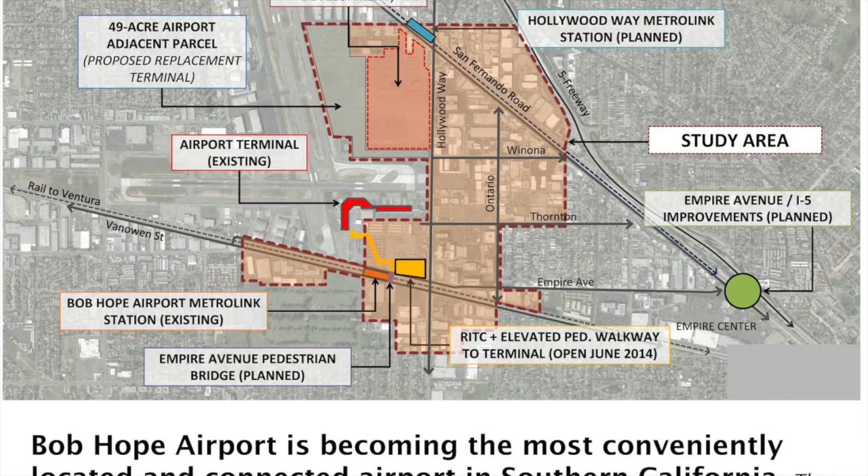So let's just first remind ourselves about what it is that we've been studying for the last 18 months. Our study area from the land use perspective is 540 acres of industrial land that is adjacent to Bob Hope Airport. It's primarily on the east and the south side, and it lies entirely within the city of Burbank.

Bob Hope Airport is clearly the defining feature of our study area, and it's a really interesting small-scale airport. It's the only airport in Southern California that has rail access. It is one of 2 airports in the country that has Amtrak access. And with the recent opening of the Regional Intermodal Transportation Center, its opportunities to connect have become even much bigger and better.

The study area historically was associated with the aerospace industry. It is still zoned primarily industrial. Lockheed was the anchor tenant for decades, but left in the 1990s. There are still significant aerospace users that continue to occupy or have business activities in the study area.

In the last 10 years, the study area has observed a fairly dramatic shift in employment trends. There are about 10,000 employees currently in these 540 acres. Industrial jobs have remained stable, about 2,500 ten years ago and still 2,500 today. What has really increased dramatically are infotech and media-related jobs, to the point where they now constitute the majority of jobs in the study area.

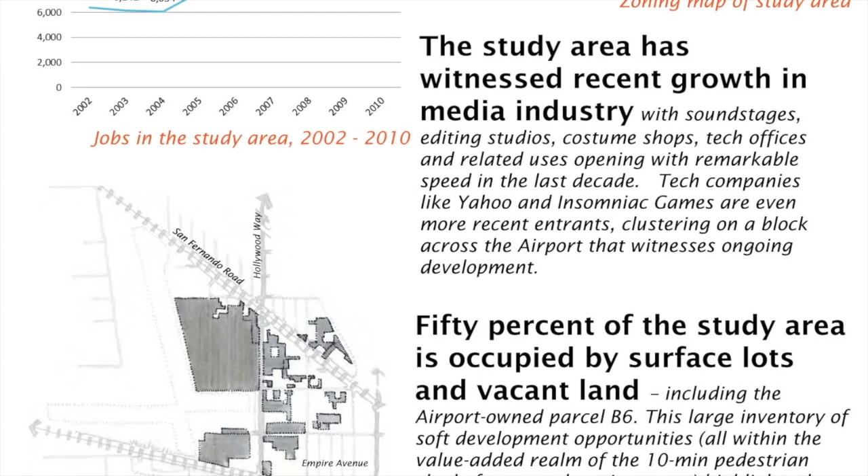So while we still consider this area industrial, the underlying industries are really not industrial anymore—they're more related to infotechnology and media. I'll come back and talk a little about why we've seen this dramatic shift happen in employment, and why the Bob Hope Airport area is so unique in that shift.

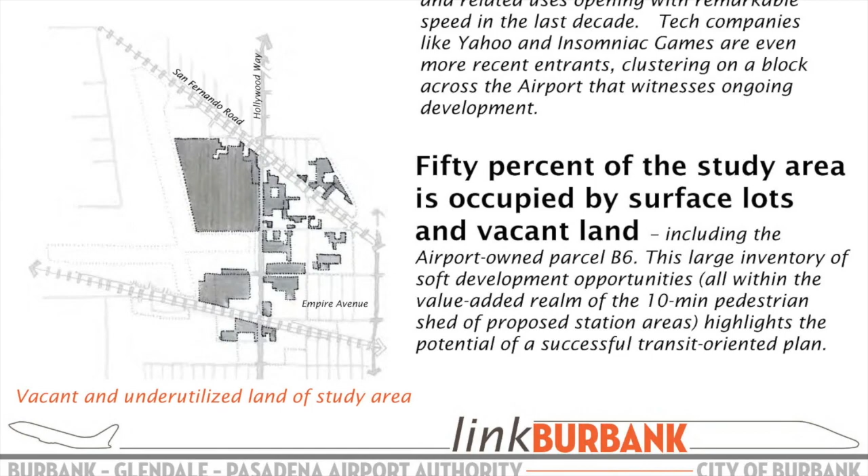The last point I want to touch on this slide is the utilization of land. The diagram on the bottom left highlights in gray all the land parcels that are either vacant, have surface lots, or are just underutilized. Our analysis shows that about 50% of that 540 acres is underutilized, so there is a significant opportunity to rethink and reinvent how land can be used in our study area.

As Patrick earlier said, this is our third and final workshop. We've had two previous workshops, one in June of last year and one in March earlier this year. A few themes have emerged from our conversations with you, and I'll touch on a few of them.

The first is this recognition that the airport is clearly an asset, that it has helped the local economy, not just of the Valley or Burbank, but of the immediate study area, the 540 acres we're looking at. Another theme that emerged very clearly is that Burbank is special—things that may be acceptable in other places, even in the region, are not necessarily so in Burbank, and we recognize and value that. We've also had discussions on the adjoining neighborhoods and this very strong desire to preserve the character of residential neighborhoods around the study area.

Upfront, I just want to say that all our analysis and the study area we're looking at is all industrial. So nothing that we're proposing directly impacts the residential neighborhoods or the residential populations adjacent to the study area.

A few more points: there's a need for the image of the area to be upgraded—the quality of the streets, the quality of the public realm, the kinds of amenities residents and workers have access to, that needs upgrading. And finally, this notion that industrial land uses and industrial zoning often preclude amenities that workers and residents of the area may look for and desire, meaning industrial land use may need more flexibility in the future.

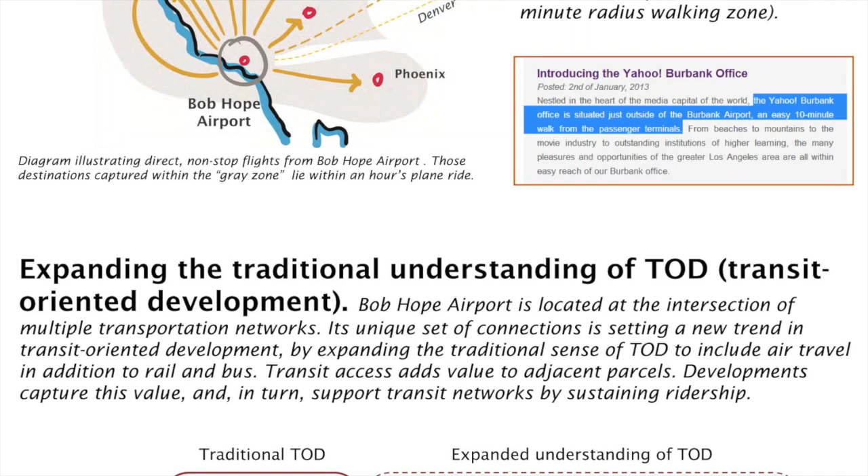Private developers capture that value by clustering jobs and homes around that access, and in return the transit system gets ridership—that's what makes the system work. Typically, transit-oriented development has been associated with light rail or bus rapid transit. When we talk of TOD, which is what us practitioners call transit-oriented development, it's usually bus rapid transit and light rail.

What we've learned through our analysis here in the Bob Hope Airport area is that the Bob Hope Airport Terminal is acting much like a transit station. The most striking example of that new thinking is the presence of Yahoo's Southern California office across the street from the terminal. If you go to Yahoo Burbank's recruiting website, they start off their description of the office by saying it is within a 10-minute walk of Bob Hope Airport Terminal—that's how a train station describes itself and its relationship to the city.

Usually airports are considered to have a negative impact on adjoining lands, but in the case of Bob Hope Airport, that is definitely not the case. Users and businesses want to co-locate next to the airport—in Yahoo's case, it takes 50 minutes to fly to San Jose to their head office, and they value the ease of access that the airport provides them.

And it's not just Yahoo. The whole cluster around Yahoo, which is Media Studios North, has tech users and clean tech users that value being located in Southern California, but also value the ease of access they have through the airport to the Bay Area.

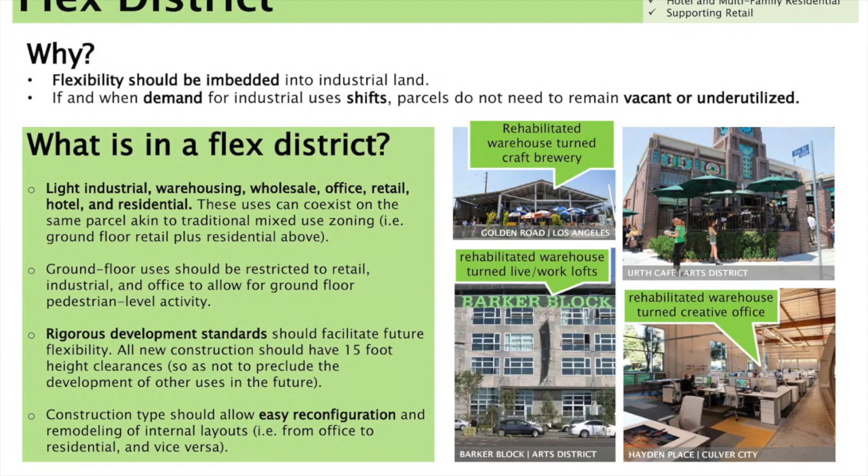To address that vacancy and underutilization, we introduced the idea of a flex district, which allows light industrial, hotel, retail, creative office, and in some cases residential uses to coexist. It's really the market demand that will determine the balance of those uses.

When we go through the alternatives, I'll show you how we're proposing to cluster the flex use districts. Again, flex use districts are not the norm, but there are places in Southern California that have explored them successfully—the Arts District in downtown Los Angeles, for example, and Hayden Tract in Culver City. Old industrial building stock, outdated, needs new life, and the city figures out a way to provide that new life.

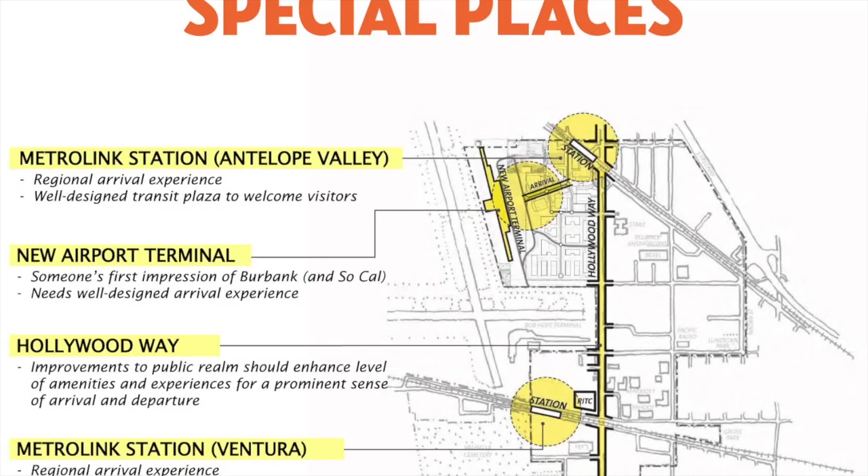We also discussed the idea of special places—places of arrival or places of heavier pedestrian traffic. The diagram highlights what we think are the special places in our study area, associated with the existing train station on the south side on the Ventura line, the proposed new train station on the north side on San Fernando on the Antelope Valley line, and an arrival experience associated with the air terminal.

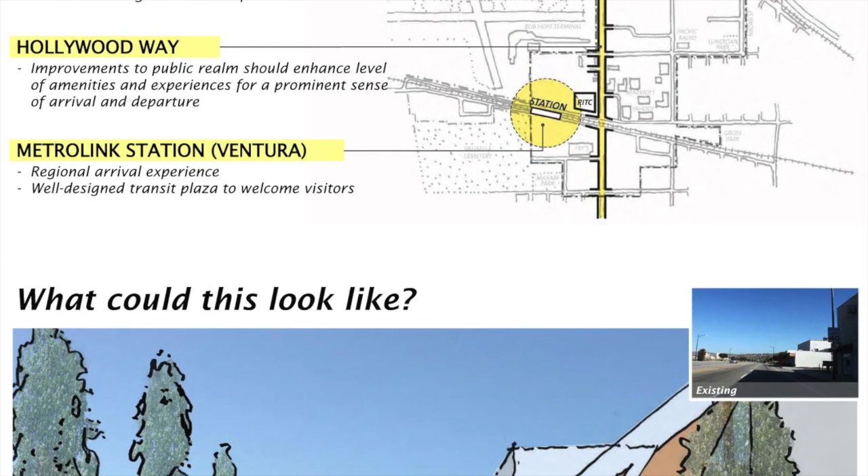Clearly, Hollywood Way would belong in that category of experiences, because everyone who visits the study area at some point has to get onto Hollywood Way. The image on the bottom is a sketch interpretation of how Hollywood Way could be improved. For those who've driven and walked down the street, it's a sterile environment.

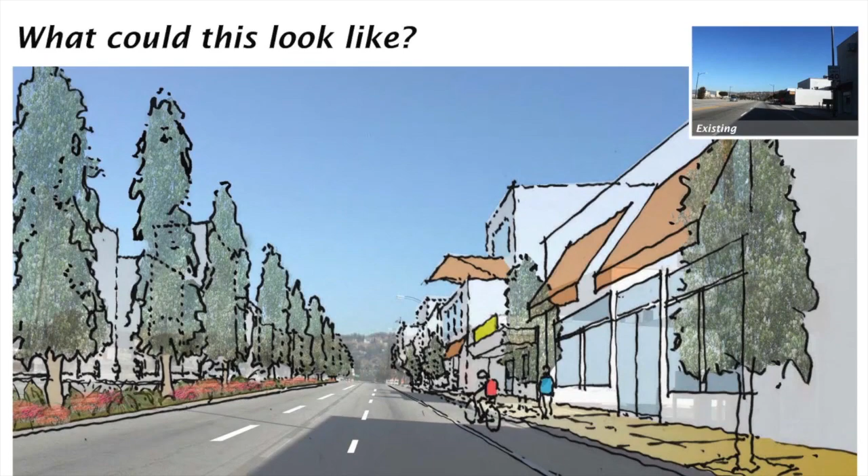It's next to a runway, and it pretty much looks like a runway. Ideas we could include are introducing a median with vegetation, and making sure buildings along the street have a street facade and main entrances, so it behaves and feels like a real street.

We also identified corridors of access—streets that we think residents, workers, and visitors would use to access destinations in the study area, including the terminal. There are four key ones.

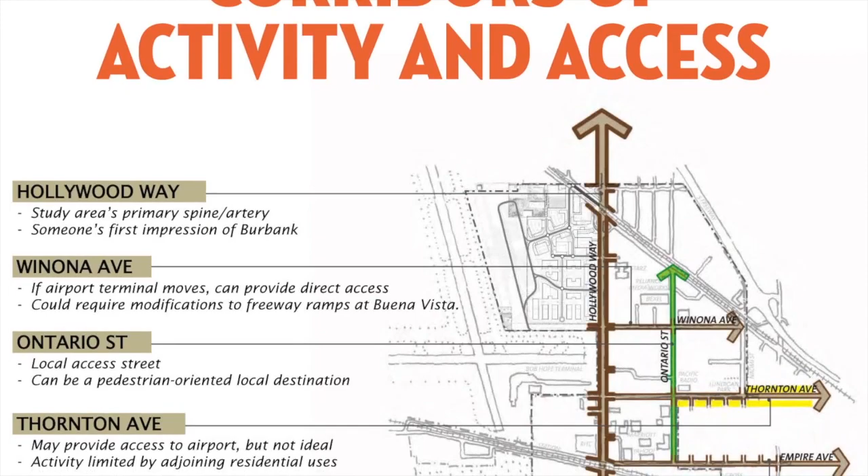There's Hollywood Way, clearly, which belongs in this category, and then three east-west streets. I'll start with the one at the bottom, Empire Avenue. Empire Avenue currently has improvements ongoing at the interchange with the 5 freeway, and it's expected that Empire Avenue will provide most of the freeway traffic on and off to the study area.

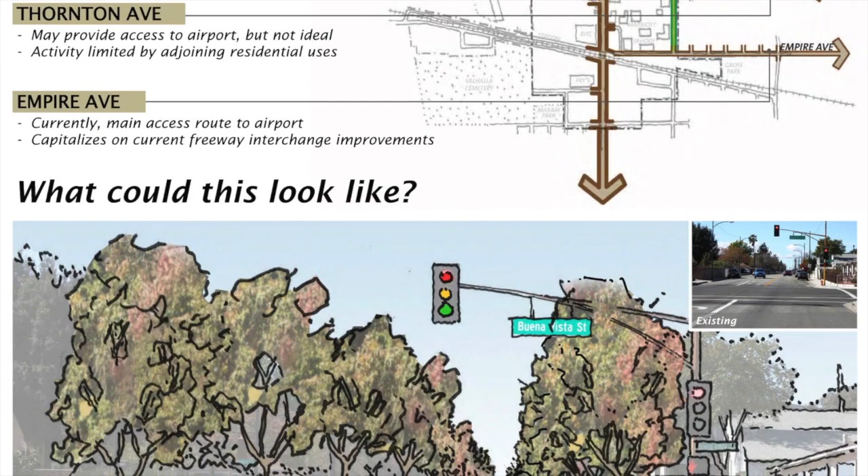The street on the top is Winona Avenue. If the air terminal relocates to the northern parcel on B6, it is likely that Winona Avenue will provide clear, straight-shot access to the new terminal. This is a better arrangement than the current Thornton Avenue arrangement, because Thornton Avenue has residential uses along its side, creating a conflict between through traffic, airport traffic, and residential uses. Winona Avenue won't have that, since it's only industrial and business uses on both sides.

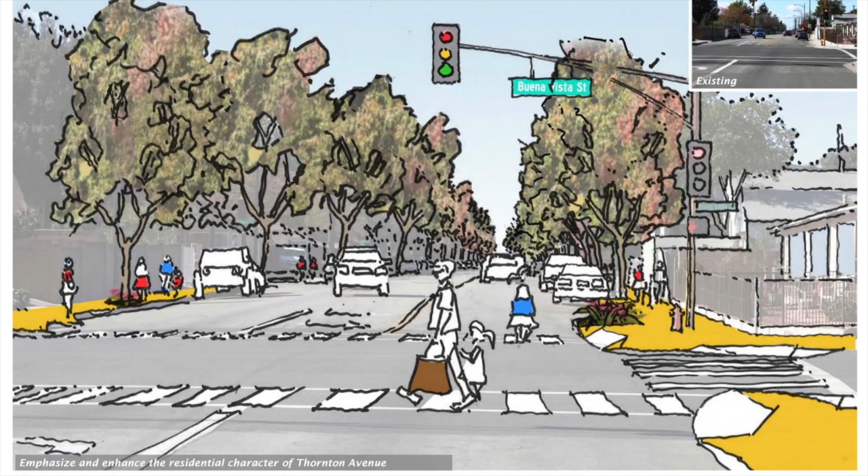This image shows how Thornton could be improved with new street trees, new crosswalks, and pedestrian amenities, to emphasize that this is more a residential street and less a street meant to provide access to the businesses and the air terminal.

All right, so now we're in the 4 land use alternatives, and I'll go through them slowly one by one, because really your input on these 4 alternatives is what we're seeking today. And I'll start with alternative 1.

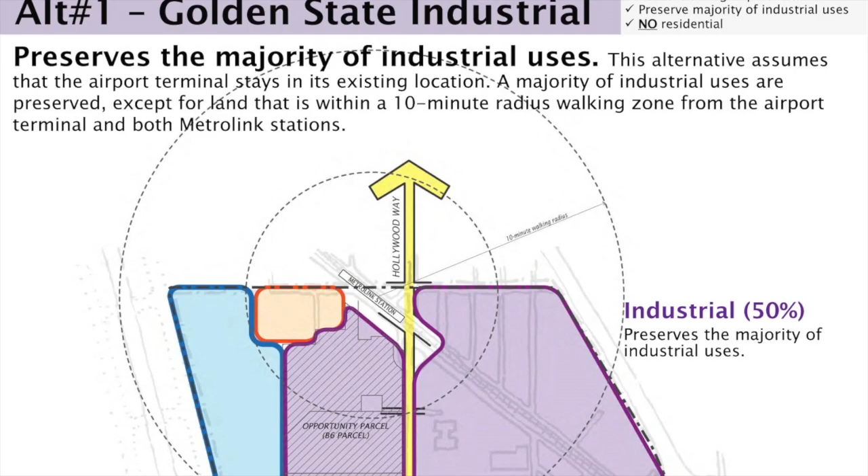I think the best way to describe it is it's closest to the existing conditions, closest to status quo. The area you see in purple on the top is industrial uses, and the majority of land area in this alternative preserves those industrial uses. So about 50% remains industrial.

The area in red labeled the Airport Synergy District more or less coincides with how Media Studios North and the Marriott Hotel have already evolved. So that's already reflecting an organic trend that has happened. The areas in light blue are airport owned and controlled, and they provide operational needs for the airport.

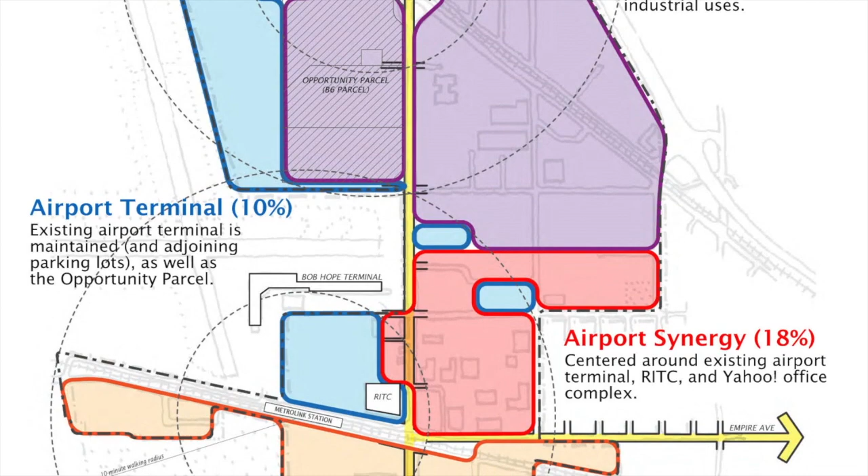The area in orange on the south labeled the Rail TOD District is a new district for this land use alternative, and that's one that proposes to cluster jobs and homes within a 10-minute walk of the South Station, the station on the way to Ventura.

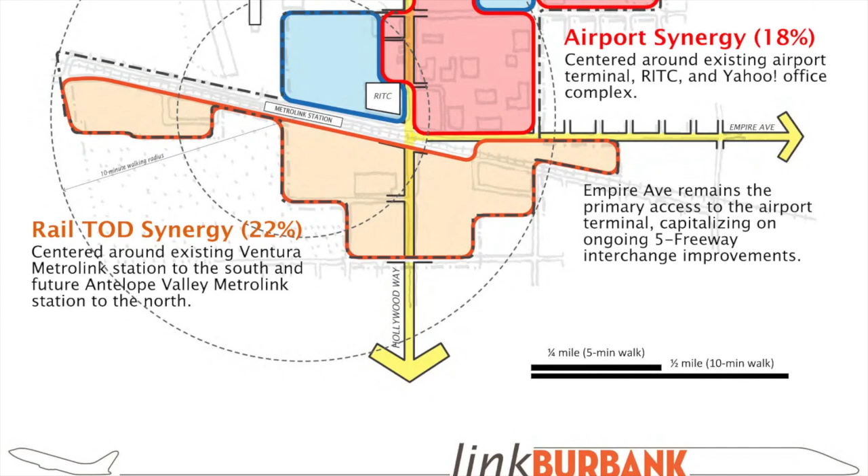Alternative 2 - sorry, there's one important piece in the last alternative I didn't call out. Alternative 1 assumes that the existing air terminal remains at its current location, and that's the only one of the 4 alternatives we'll talk about today that assumes that. The other 3, starting with alternative 2, assume that the air terminal is relocated onto B6 to the north.

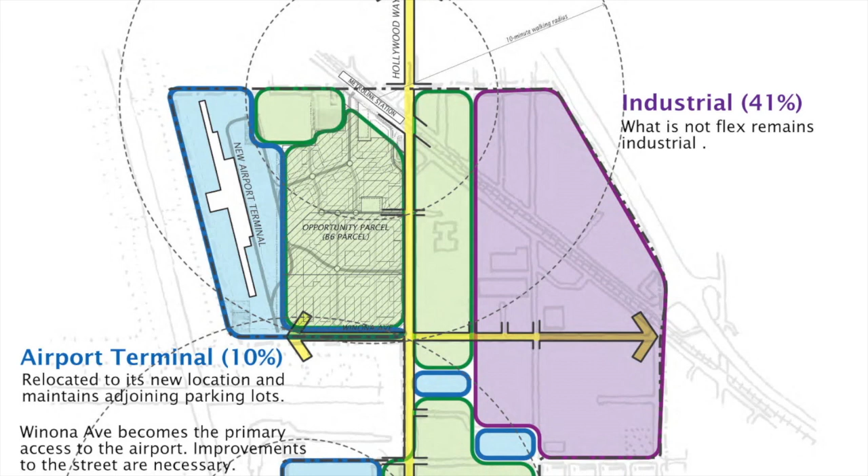So alternative 2 is the first alternative where we throw in the idea of a flex use district. It's arranged in green - that's the footprint you see along Hollywood Way - and everything else is industrial. This alternative, similar to alternative 1, tries to preserve as much industrial as it can, but also provides the flexibility along Hollywood Way, which is a main corridor, for new uses and amenities to be co-located.

Alternative 3 provides the greatest diversity of uses. In fact, all 4 land use categories we've discussed find themselves in alternative 3. It again assumes the terminal is relocated to the northern parcel.

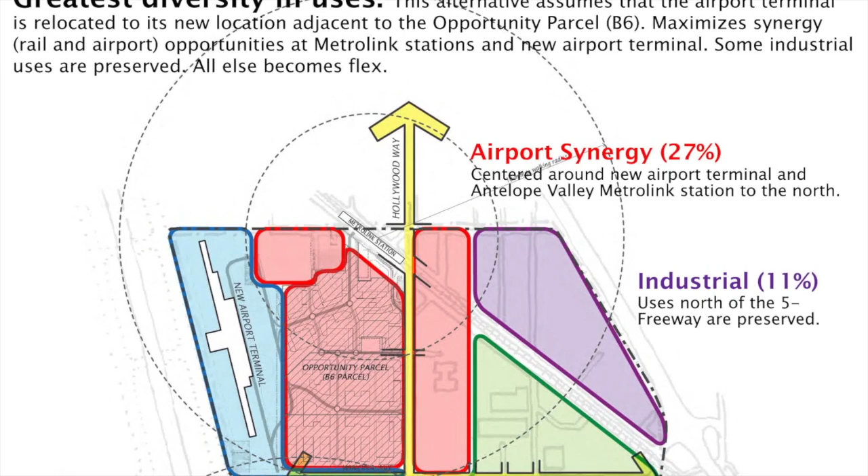Associated with that relocated terminal is a new airport synergy district, and it sits over B6 and the opportunity parcel. Just FYI, that's a separate planning process, environmental process that the airport and city are going through currently, but it meshes well with an idea that also happens to exist in this plan.

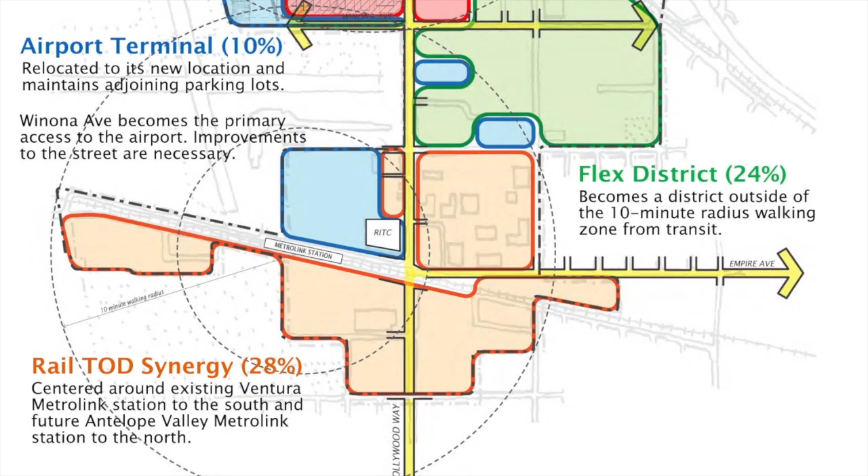The industrial uses, which is the purple island north of San Fernando, are located there because it has direct freeway access - it's easy to get on and off the 5 freeway, and that's important for industrial uses. There's a rail synergy district associated with the southern station on Empire Avenue, and then a flex district that is beyond the 10-minute walk of both the air terminal and the existing and proposed train stations. That would allow industrial uses to coexist with other uses depending on market demand.

Then the fourth and final alternative is the one that represents the greatest shift from status quo. And it's pretty clear from the diagram that the areas in red, which is the airport synergy district, has the maximum footprint in alternative 4.

This is based on the assumption that the relocated air terminal will continue to play a role in generating employment in the local economy, but over time that role will become bigger and bigger. So it represents clearly a more intense scenario.

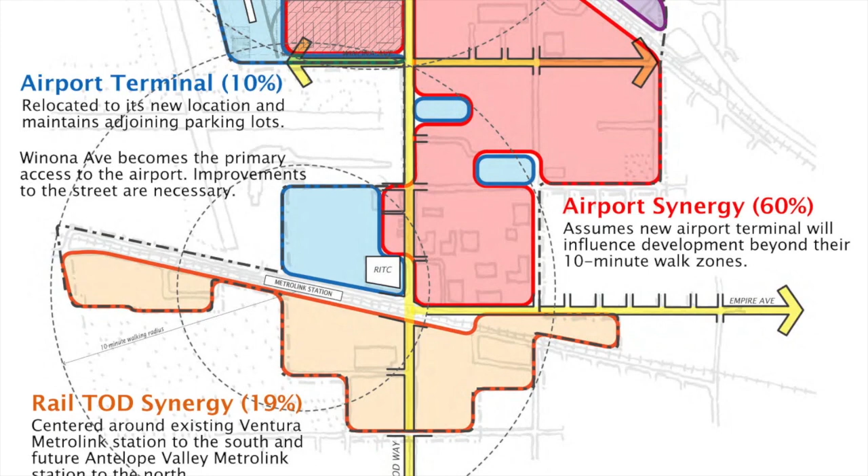The industrial uses, again, are preserved on the north of San Fernando, and that's true for all four alternatives - there's always some attempt to preserve existing industrial uses. And there's a rail synergy district south of the Empire Avenue rail tracks.

All right, so we took this exercise one step further, and we undertook some urban design explorations to try and visualize and illustrate what impact these land use policies would have over a 20 to 30 year period.

So I just want to be very clear up front that the designs you see here on the model, on the boards, and on the slides that are going to follow are just hypothetical explorations. These are not proposals - we do not control the land, but they are meant to indicate the urban environment one can expect to see 20 to 30 years down the road if the city decides to pursue the air synergy district or the rail synergy district.

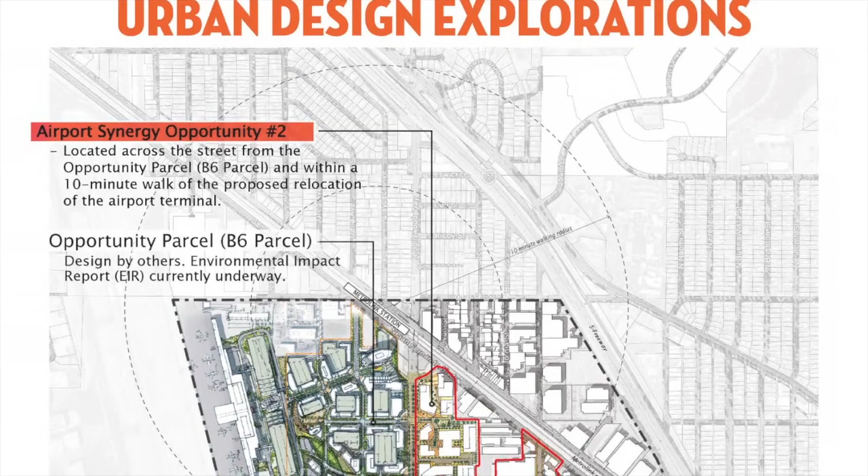There are 4 clear opportunities that we see. I'll start with the one on the south, labeled Rail TOD Synergy Opportunity, associated with the existing Metrolink station in Ventura. It's on the parcel currently occupied by Fry's Electronics. We're not proposing to get rid of Fry's—it's clearly a retail landmark for the entire valley. But we've studied a scenario where we could introduce new uses, replacing the vast extent of surface parking around Fry's, because surface parking isn't the best use right across the street from a train station.

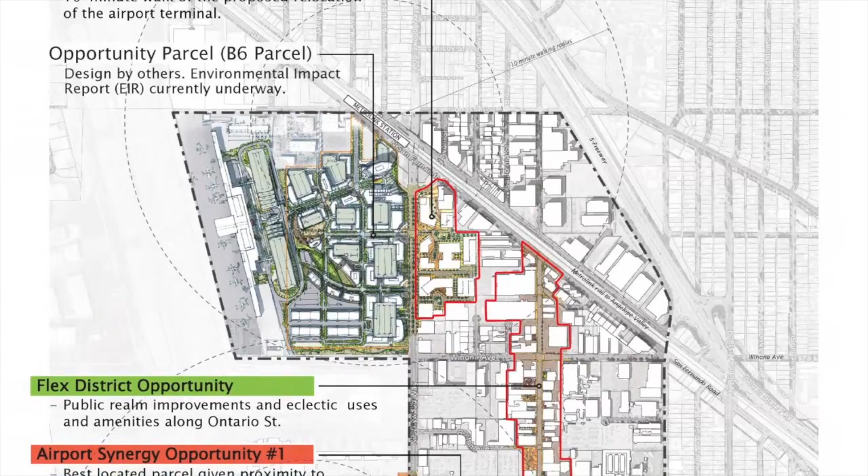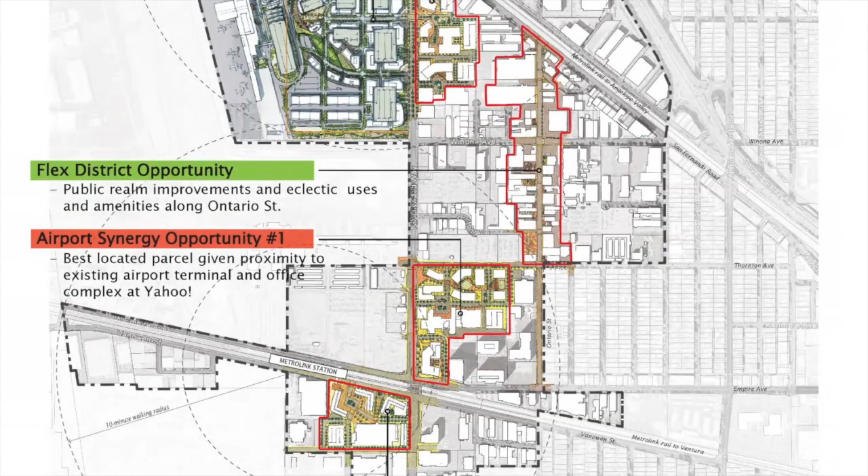The red boundary just north of it, Airport Synergy Opportunity number 1, is associated with the existing Marriott Hotel, which has a lot of surface parking along Thornton. Given its current condition, where the terminal is currently located, it's probably the best located parcel from an airport synergy standpoint—it's right across the street from the terminal, the shortest walk to get to. One could argue that what Media Studios North has done further south could be done, and more, on that parcel. We'll show you some design studies on how that may work.

The 2 blocks of Ontario are not really new development opportunities, but they illustrate a model for how aging industrial buildings can be rehabbed and reused.

The 4th opportunity is on the east side of Hollywood Way, across the street from the opportunity parcel—an airport synergy urban design exploration that assumes the air terminal is located to the north. The benefits of that relocation flow not just to the opportunity parcel on the west side of Hollywood Way, but cross the street and impact land on the other side, where Star's cable office currently sits. So it's off to Larry.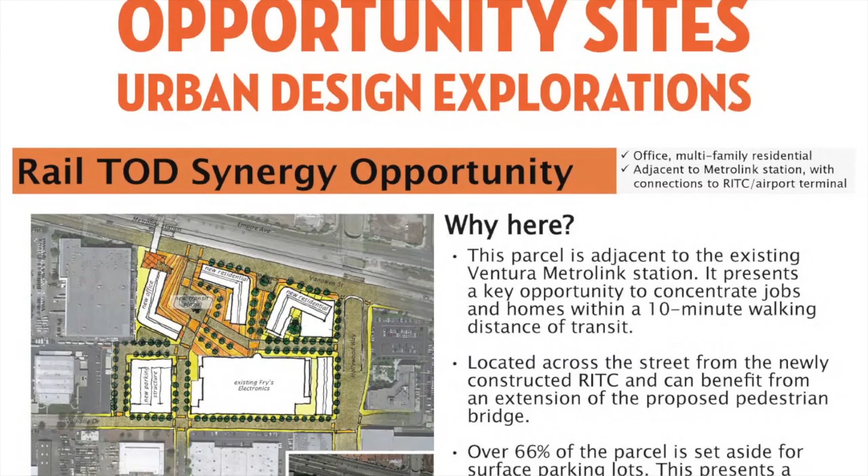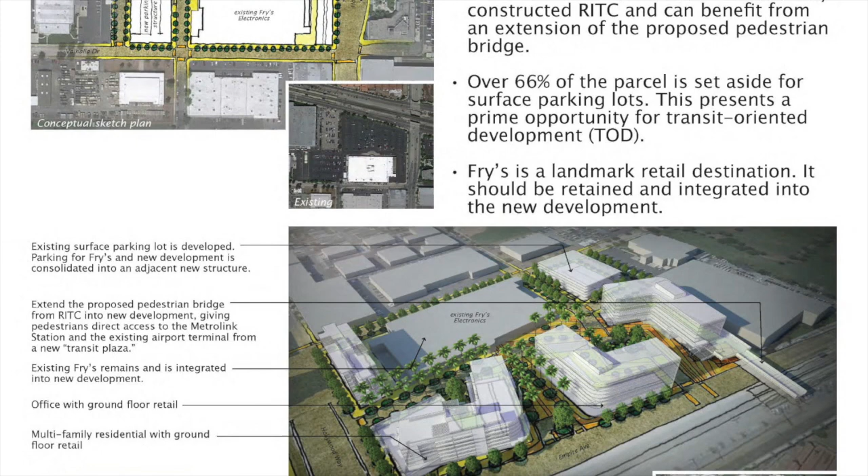These images are for the Fry's parcel. What we're proposing hypothetically is new office and residential, because this presents the best opportunity to cluster jobs and homes adjacent to transit in our study area. We've retained Fry's, so it becomes a mixed-use district. There's also an idea to extend the proposed pedestrian bridge from RITC to the Metrolink station, bringing it across the street to the south side, so the arrival experience of that train station is on the south side of the street on the Fry's parcel. There's a heavy emphasis on the quality of the public realm and the experience of visitors, residents, and hotel users, if there is a hotel.

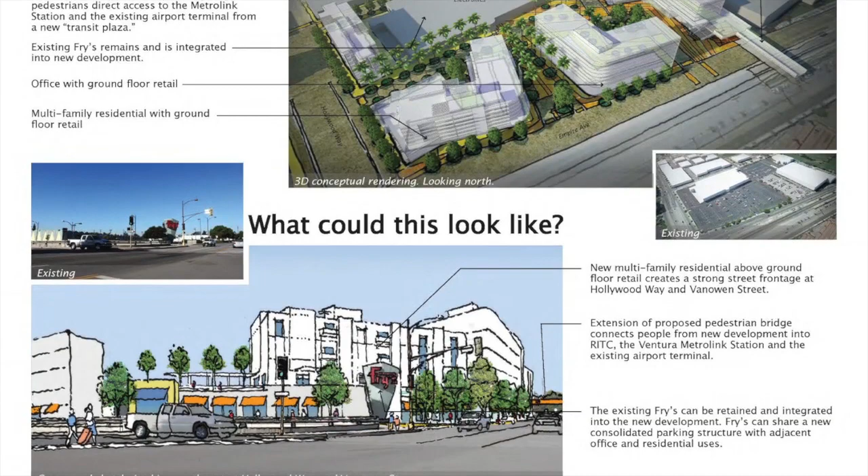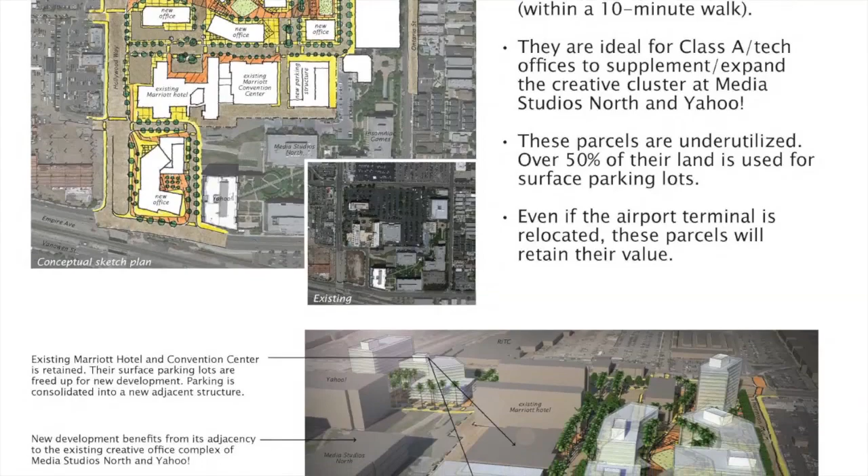The images on this slide illustrate the office opportunities that exist adjacent to the Marriott Hotel. The public realm and open spaces depicted emphasize the connection and how easy it is to get from this parcel to the terminal. One could imagine other high-tech users from Silicon Valley valuing this parcel, wanting to locate to Southern California because of that quick and easy connection.

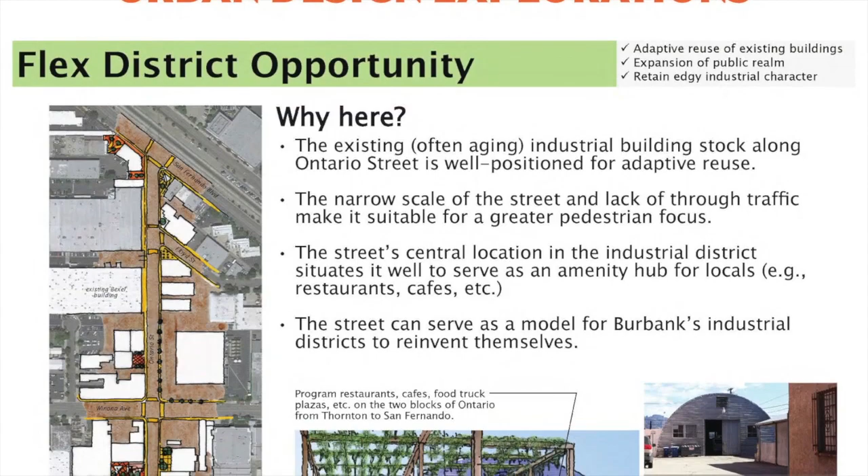These are images that don't show any new development. This is the Flex opportunity, along 2 blocks of Ontario from San Fernando down to Thornton. These sketches show existing industrial buildings that have probably been around for 50, 60 years. One of them is vacant—the one on the bottom is definitely vacant—and they could be rehabbed and reinvented with new uses.

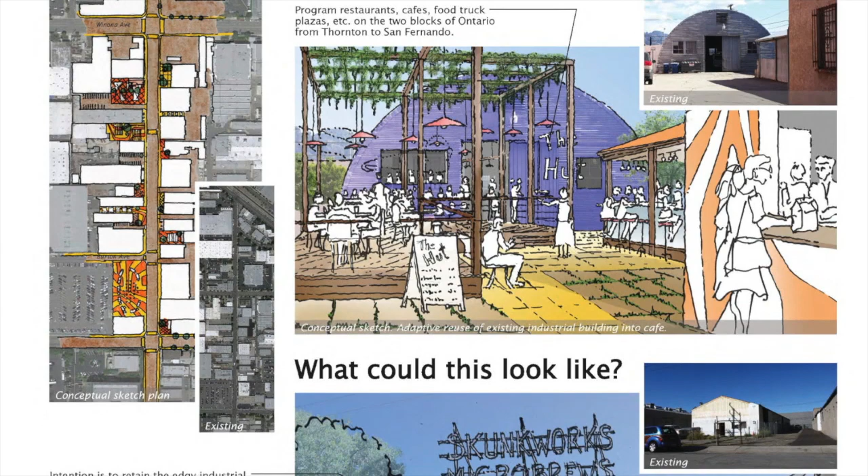There's a microbrewery in an aging warehouse, a model that's been very successfully used in other industrial districts in Southern California, and there's no reason it couldn't happen here. That's an old Quonset hut, still currently used but with inherent character, an old building that could someday transform into a restaurant. There are very proximate examples of how this has been successful—if you're familiar with Golden Road Brewery in Atwater, they took an aging industrial shed and first programmed it just to be a brewery. Then they realized the value of getting visitors to that place, so now there's a pub, and it's very successful.

We think this will help the study area by allowing a diversity of experiences, ones not currently available to residents or workers in the study area, because the only places to have lunch are the fast food restaurants along Hollywood Way or the cafeterias in this very upscale corporate environment. Introducing something like this provides a diversity of uses, not just for residents, but also for workers who frequent this place.

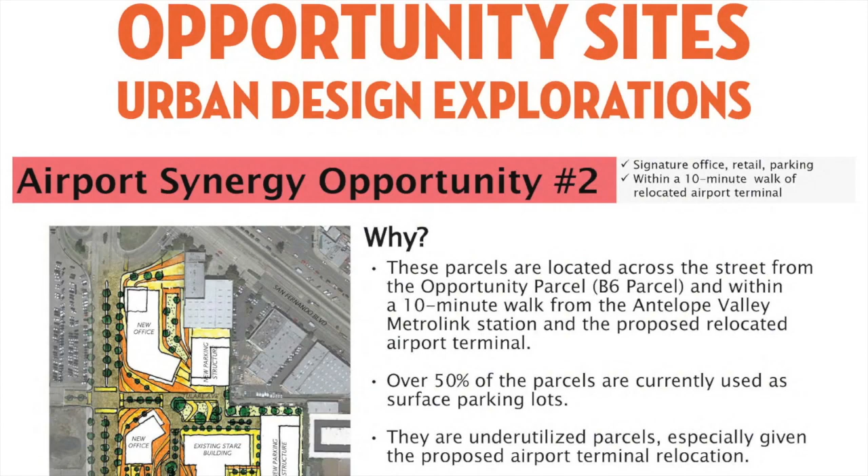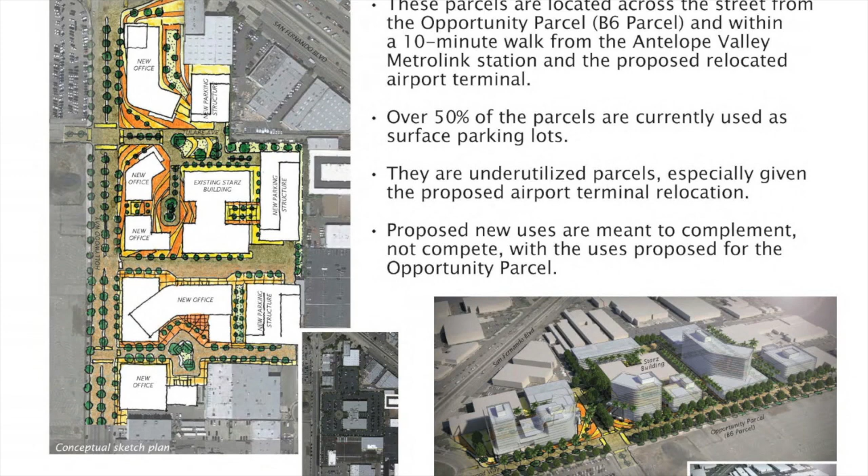And then finally, this is an illustration of what is possible on the parcel across the street from the Opportunity parcel, where the Starz office building currently is. Similar to Fry's, in this situation too, we retain the existing building and introduce new structured parking to take care of all that surface parking currently around it. To replace that surface parking, a new Class A office space would attract users who want to be close to the terminal.

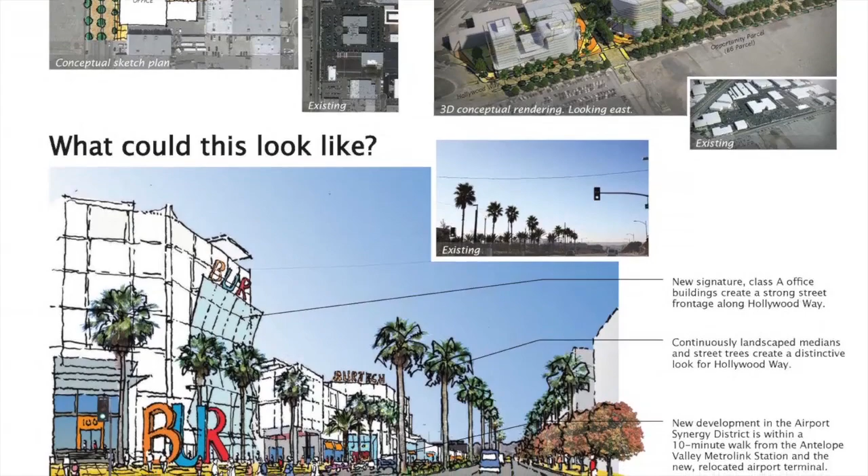The sketch on the bottom shows what a dramatic impact that may have on Hollywood Way, which is not a street any of us would currently portray as something the city should aspire to. It's clearly in need of attention and more energy. I think an opportunity like this will help Hollywood Way become something better.

That concludes my quick overview. We're here for another hour at least, so we're happy to answer questions. Before I hand off to Tyler, I just want to quickly summarize these four slides again. These were hypothetical explorations. None of this is a proposal, so none of this is going to happen anytime soon, or if ever. But these are just examples of what one could expect to see if these policies were pursued.

Hi, my name is Lynn Kronzik, and I'm just wondering, I haven't heard anything about conference facilities or spaces. Maybe it's because of the different nature of businesses currently located there, like the technology firms, and maybe they don't need conferences or conference facilities, but that hasn't really been addressed. And I wonder what has been going on in the interim.

I've seen some changes on Hollywood Way that frankly don't please me. There was a Deco automotive center, probably from the 30s or 40s, that I thought was beautiful, and it was torn down. Now there's a trucking space nearby — I don't know if it's the same exact space — but I'm wondering about the interim. So there are two questions: one deals with conference space, and the other deals with who's been minding the store as the planning goes on.

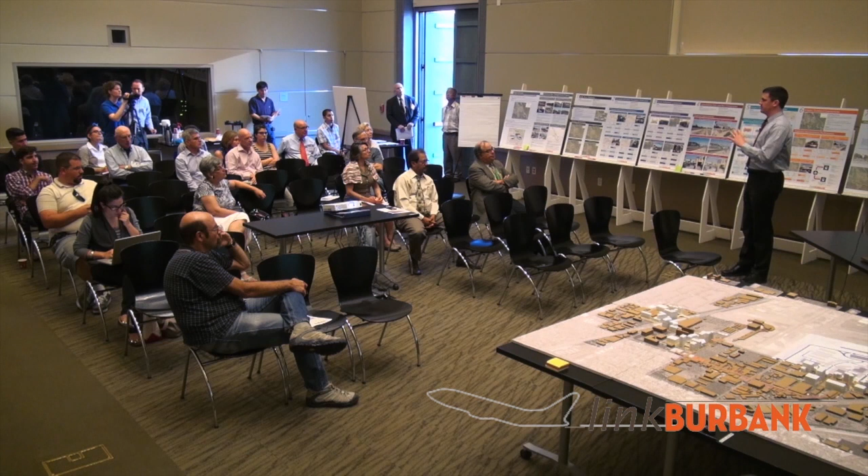I guess just briefly to add to that, alternative 4 for transportation is also, I think, where we're starting to look at what the impacts would likely be with a high-speed rail station there. And that's where we're starting to talk about maybe we need a subway extension up to that area to handle those kinds of passenger loads. So yeah, it's tough to pinpoint yet exactly what that is, so we're kind of trying to generally accommodate it with our alternatives and then focus down more on it when we get more detail to work with.

I'm going to move this up.

All right, well hello, I'm Tyler Bonstead with STV, and we are leading the transportation part of this study. Basically, this side of the room focuses on the transportation issues. I'm just going to walk you through some of the key ones that we looked at as part of this study.

So just starting with what the project goals are, I think I've covered this at the other meetings too, but I just want to reiterate that. We're looking for the airport to move beyond being an air hub to a transportation hub for the entire San Fernando Valley area. That's one of our main goals.

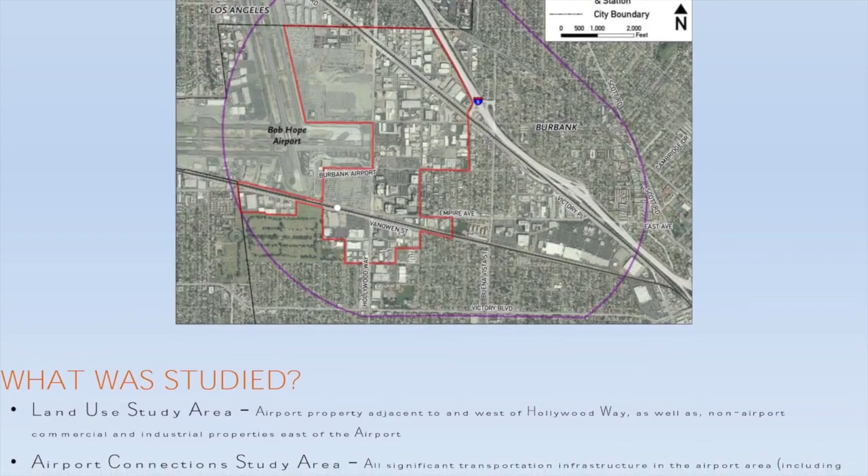And we cast a bit of a wider net than the 500-acre study area that the land use study is looking at, more out to the immediate Burbank area and then even out to regional connections a bit further out, which you can see pointed out in this picture, along the Metrolink lines to the rest of the region, over to Burbank, Glendale, and Pasadena, down to North Hollywood, and then also some improvements in the airport area itself for the roadway system, for bikes and pedestrians, for the terminal connection to transit, and also for the connection between buses and trains.

So there are 7 main areas that we're looking at, which I just described, shown in the 7 different colors on this board, and I'll go through each one. We're looking, similar to the land use study, at 4 different options for each one of those key areas, which generally go from less expensive, more near-term alternatives to more expensive, further-out alternatives. So for each one, I'll walk you through that.

What we have been showing before also is, I think we have a pretty good idea of what these alternatives are that we've shown at the last meeting. What we really want to focus on today is how they perform, what their cost and ridership and issues like that are. So I'll be getting into a little bit more detail.

One thing I want to note first is that there's actually been quite a bit of work done in the near term in the airport area on transportation issues already. There are 4 things I'd like to point out, the first of which is the Regional Intermodal Transportation Center, also known as RITC, which just had its grand opening a few weeks ago, and which brings a consolidated rental car facility as well as improved bus and train connections to the area just south of the airport terminal today.

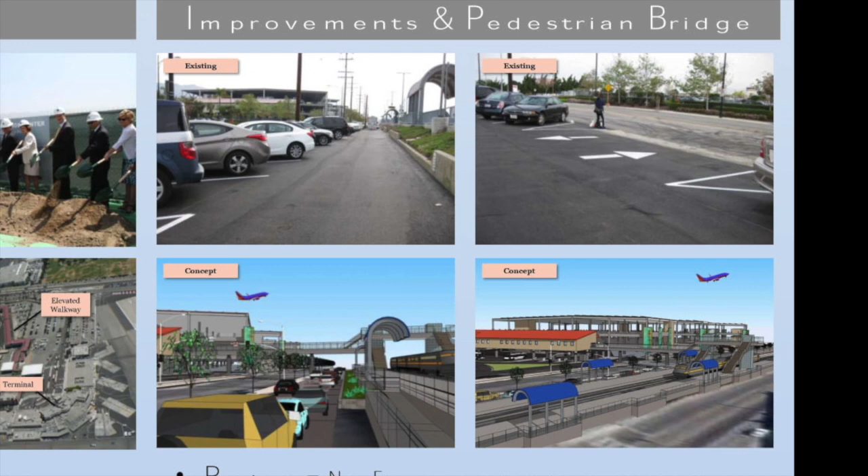Another piece is improvements at the existing train station on the Ventura County line. On the top two photos on the right, you can see improvements to the parking lot that were just installed recently by the state of California. On the bottom are two renderings of a new pedestrian bridge, which now has funding and will be starting design soon, hopefully implemented in the next few years.

That will basically connect into that elevated walkway, which already goes from the airport terminal to the RITC, and allow you to go the rest of the way from there across the street, across the railroad tracks, and down to the platform. That'll be a great new connection to make an easier trip from the train station to the airport terminal.

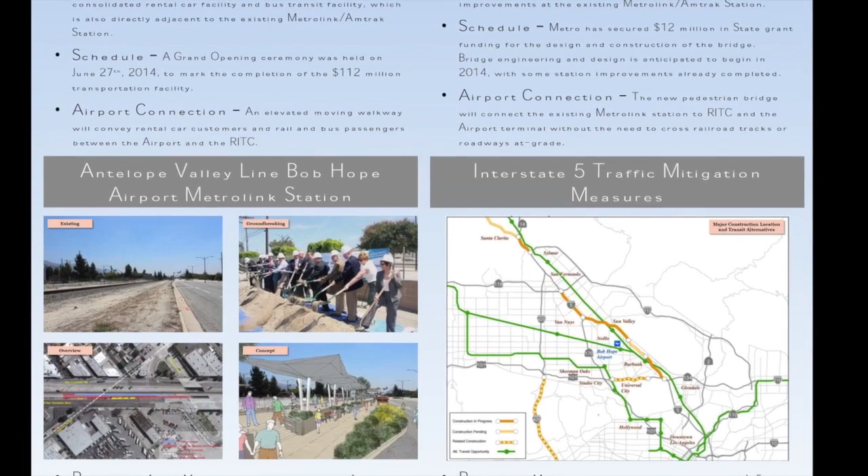A third exciting project is a new Metrolink station on the north side of the airport, for the Antelope Valley line, which runs between downtown LA, Santa Clarita, Palmdale, and Lancaster. That is along San Fernando Road at Hollywood Way, and it will be starting construction very soon and opening early next year. That will provide additional options for people riding the train to the airport area.

A final piece is mitigation measures that are part of the I-5 construction project. There have been some recent items moving, especially through the Metro Board, to provide mitigation during construction. Some of the things included in that package are improving Metrolink access to the airport, improving the hours of operation for Burbank Bus, and also looking at a new bus service, which I'll talk about in more detail later, between the airport, Burbank, Glendale, and Pasadena.

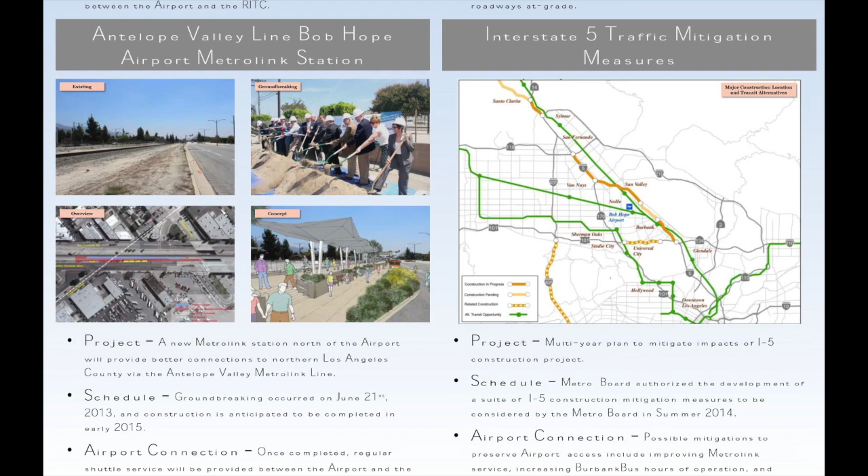So those are all items that are part of the transportation fabric today, and that we're looking to build upon as part of this project.

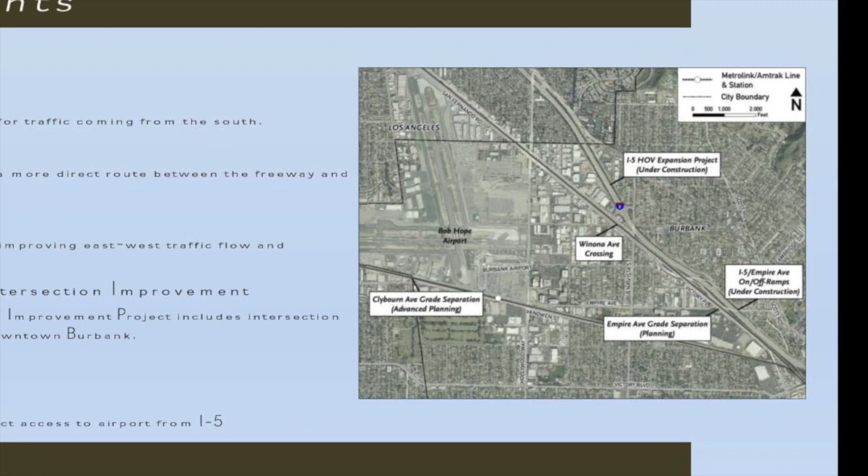The first key area we looked at was roadways in the study area. There are lots of existing roads and freeways in the area, and a couple projects already in the works. I already talked about the I-5 project, which is adding a carpool lane and other improvements to the freeway. There's also the Empire Avenue grade separation and interchange, which will connect Empire Avenue directly to Interstate 5. I think the off-ramp was recently closed in that area to accommodate that construction.

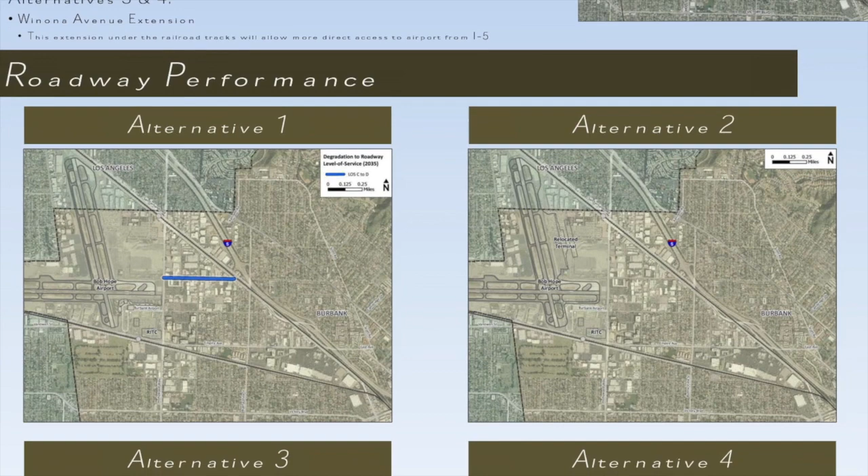It will also elevate the train tracks over Empire Avenue and also over Buena Vista Street, coming back down to grade at Hollywood Way. That'll really be a great new separation of train and road service, and also provide a new southern access into the airport along Empire Avenue, as opposed to today when people might come in along Thornton, like Gaurav talked about earlier, or along Hollywood Way.

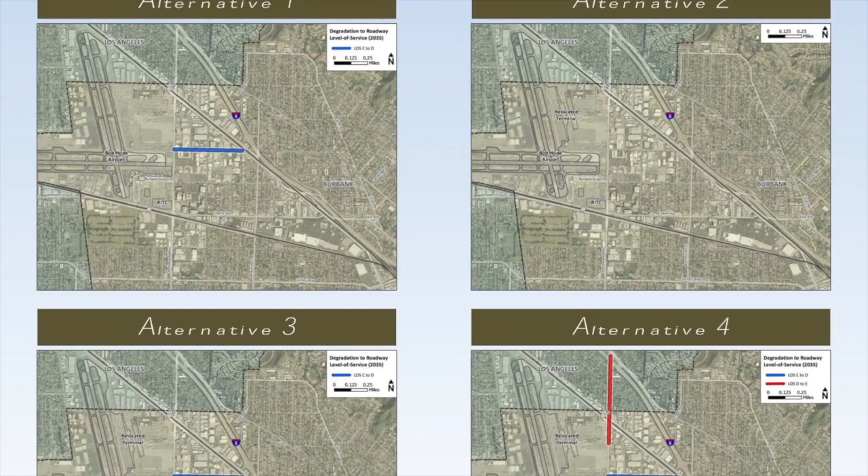Another interesting project on the west side of the airport, which is at earlier stages, is grade separating Clybourn Avenue, a track between Vanowen and Empire Avenue on the west side of the terminal. That's something in the works, hopefully. There are also improvements at San Fernando Boulevard and Burbank Boulevard, a little bit outside of the study area.

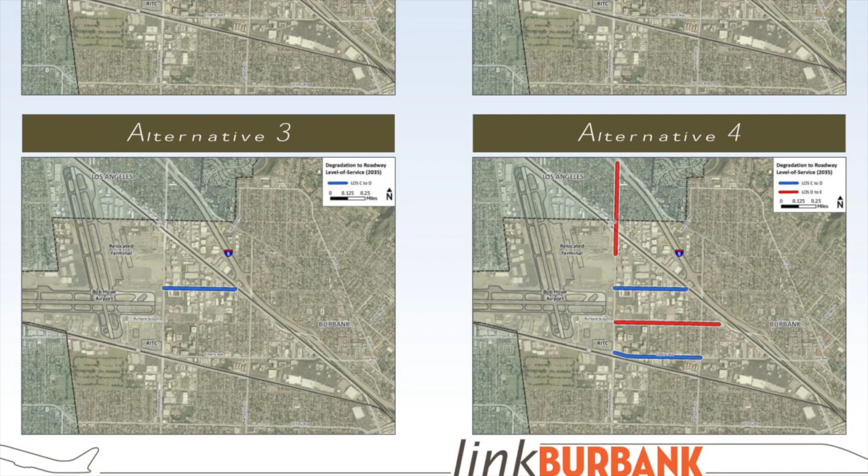One additional roadway improvement we're looking at as part of alternatives 3 and 4 is improving Winona Avenue and actually extending it under the railroad tracks, where there's space for it as part of the design, allowing for more direct access between the freeway and a potential replacement terminal on the northeastern quadrant of the airport. That's included in several of our alternatives. Otherwise, we didn't include a huge number of roadway improvements. We're mainly focused on ensuring continued roadway access in the area, and focusing a bit more on transit connections also.

To give an idea of how these roadways perform, what we highlight here are basically roads that have a decreased level of service as part of these different alternatives. It mainly focuses on Winona Avenue, as that may become more of a direct access into the airport, and also, once we get towards alternative 4 and some of the more intense land uses, some effects possibly on Hollywood Way and Empire Avenue. For the most part, though, the roadway improvements and impacts are fairly limited as part of these alternatives.

Next up, what I'd like to talk about is the connection between the airport, downtown Burbank, Glendale, and Pasadena. There's not a single line that you can do that with today. You usually have to transfer between a bus or two. So we really looked at 4 options to do that.

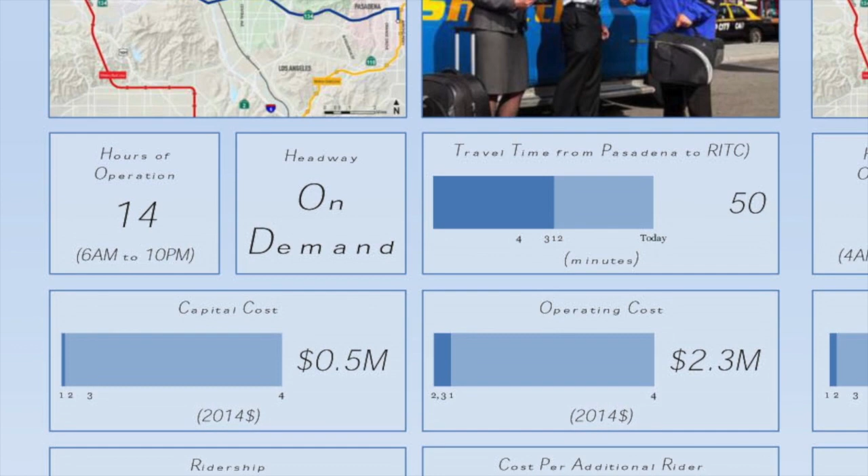The first one is an on-demand shuttle, similar to the Super Shuttle service that currently connects the airport to the North Hollywood station, but running over to the Pasadena area instead. What you'll see here are key metrics: roughly at rush hour, around a 50-minute travel time from Pasadena to the airport area, a capital cost mainly for buying these shuttles of around $500,000, and an operating cost of a couple million dollars a year. That yields a ridership of around 440 people per day, which is fairly low, and a cost per rider of around $17.

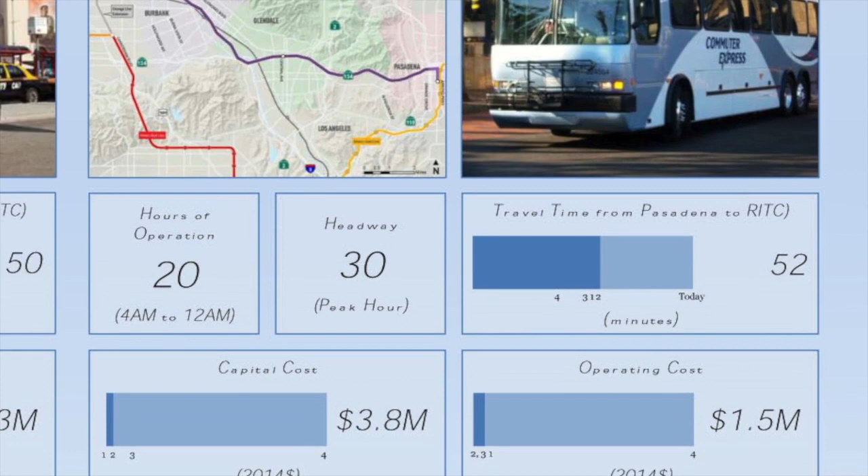The next level up from that is having a regular bus service running every 30 minutes in that same corridor. You see roughly the same travel time, a bit of a higher capital cost, and a little bit of a lower operating cost, depending on how those headways work out. Ridership roughly doubles when you put in a fixed route service like that, and you get a bit of a better cost per rider.

Alternative 3 continues that bus service out to Pasadena, but adds improvements on the freeway to allow it to more easily enter and exit the carpool lane that runs in the center of the freeway. Those improvements are pretty costly, in the hundreds of millions of dollars range. Ridership does go up a bit more, from 880 to 1,400, but not a huge bump, so the cost per rider is actually quite a bit higher. This suggests that at least to start, you might want to focus on using the existing infrastructure as opposed to building new infrastructure here, and then once you have that ridership base, think about improving it past that.

The final option, the high cost one, would be a light rail line connecting the Gold Line in Pasadena to the airport area through Glendale. It has a lower travel time, down to the 30-minute range during rush hour, but a very high capital cost—over $3 billion estimated—as well as a high operating cost, close to $30 million. But the ridership is very big: 25,000 riders a day is what we're estimating, and the cost per rider is actually less than some of the bus options. It's an interesting long-term opportunity for the corridor—pretty high ridership, but also a very high cost to get through that very densely populated corridor in certain areas.

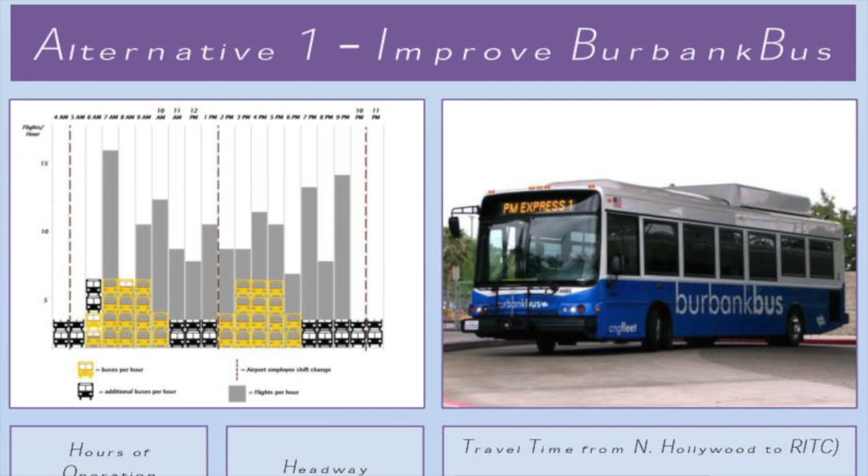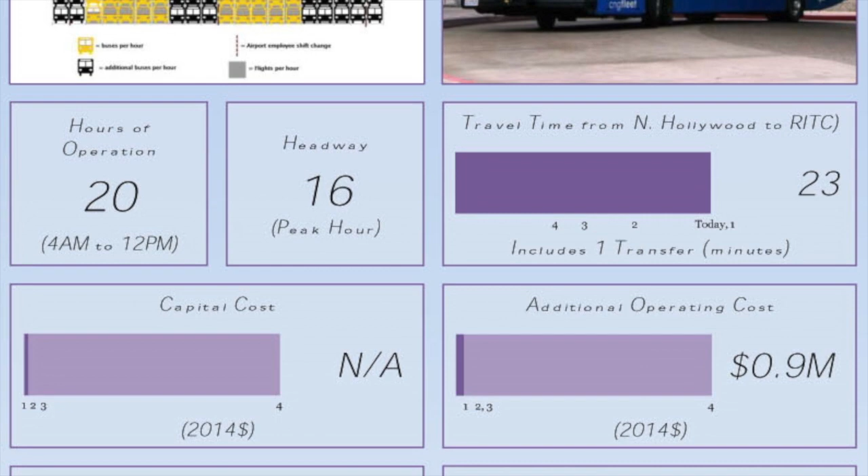What we're proposing as part of the first alternative is adding new service to fill in those gaps all day, so if you take the Red Line to North Hollywood, you'd have a bus there pretty quickly to take you the rest of the way up to the airport. That's around a 20-minute travel time for that connection. There's not a big capital cost at all because you already have buses that run there—you'd just be running them during the midday period when they don't run today. With additional operating costs, you get respectable ridership: almost 1,000 people, for about a $3 cost per rider, which is pretty low. The second alternative we're looking at is extending the Orange Line actually to the airport.

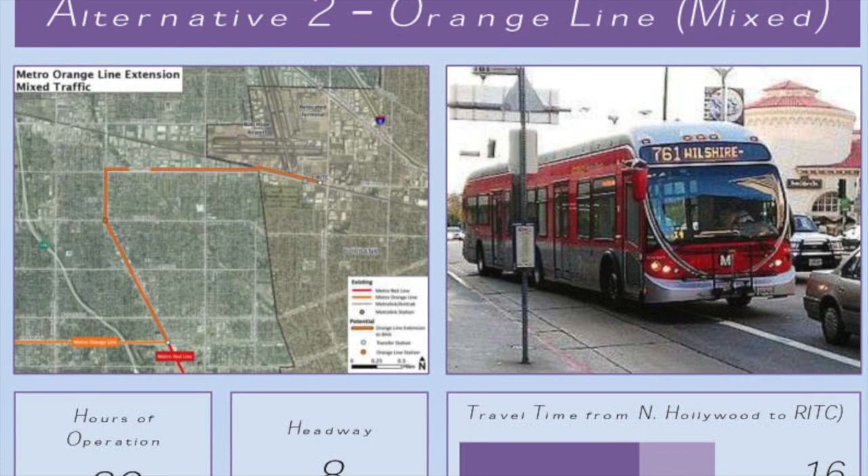In this case, we're not talking about having a dedicated busway like you might be familiar with for the Orange Line through the rest of the San Fernando Valley. It would basically run in the existing street lanes. But it would allow someone coming from the west part of the valley to not have to transfer, just get on the bus out by Warner Center, and take it directly to the airport area.

What we show there is that you get a better travel time. We're typically expecting to be running up Lankershim Boulevard and then over on Vanowen, with additional capital costs to buy some additional buses and put in new bus stations, plus operating costs. But you see a gigantic bump in ridership—something like 9,000 riders a day, which is a great number, probably approaching the capacity of the Orange Line to accommodate that many people.

But also an amazing cost per rider of $1. So as far as our modeling shows, it's a very cost-effective option. But like I said, it might even be approaching the limits of what a bus can actually accommodate with 8-minute headways.

The third option here is actually to run those Orange Line buses, but give them their own lane in the street. We're not talking about a separate busway like you have for the Orange Line now, but basically carving out part of the road for them to go in. You see that even increases ridership further, to around 12,000 riders a day. There are some additional capital and operating costs, but once again you have a very good cost per rider.

And the final option we're looking at is to extend the Red Line, the subway, basically the entire way to the airport, stopping on the south side of the airport, kind of where the transit center is today, and then also ending up in the north where there may be a high-speed rail station going in that general area.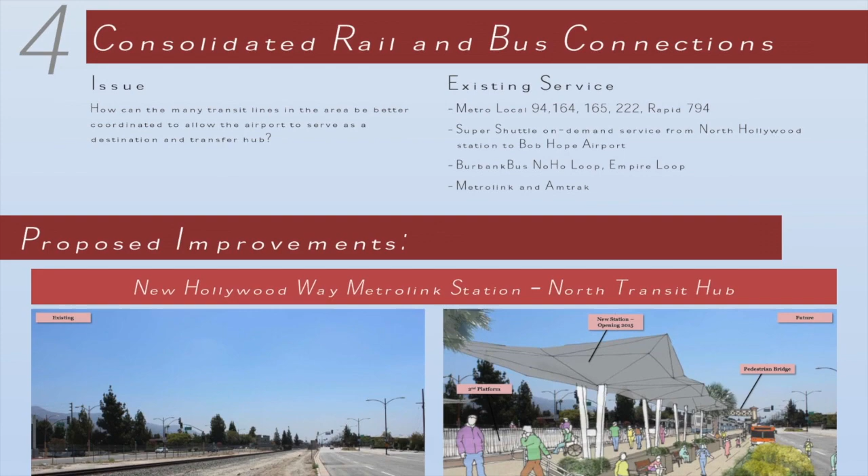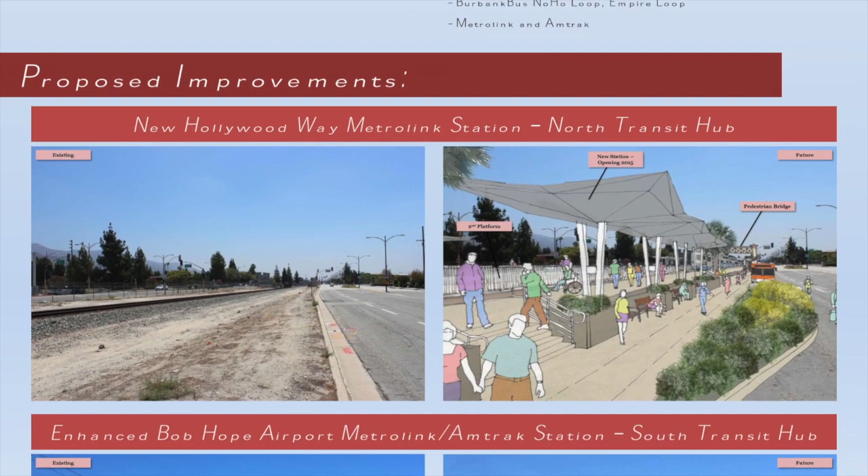So what we're showing here is a rendering. This today is on San Fernando Road, looking south in the Hollywood Way area along the railroad tracks there. And what's going to be going in early next year is a new train station, shown on the right there—the general design for the canopy and for the bus stop and where people will be able to go. One thing that's interesting is that in the future there's likely going to be a second track through the area, so you'd need to think about a second platform on the other side of the tracks.

It's a bit hard to see in the background there, but maybe a pedestrian bridge going up and over to provide that kind of connectivity across the railroad tracks. So that's kind of a rendering of how that could look ultimately, with really a great transit hub on the north side of the airport area there in the Hollywood Way, San Fernando Road area.

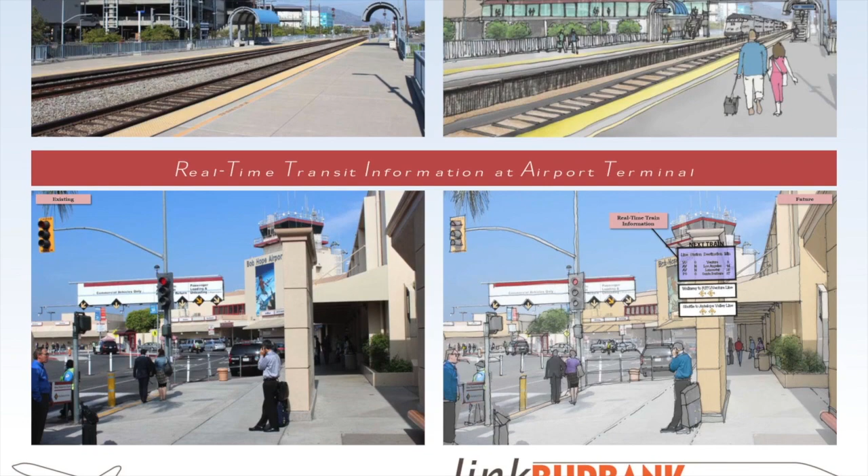On the south side of the airport, what you can see in the upper left picture is the current, recently opened Regional Intermodal Transportation Center. This is looking at the existing station on the south side of the airport where Metrolink and Amtrak trains stop. What we show on the right is the new pedestrian bridge that would be going in the near future, along with a couple other items—changeable electronic signs on the platform, which give you an idea of when flights are taking off.

Because if you have people going to the airport, you want to give them as good an idea as possible of the connections they're making. Gaurav talked about airlines as transit also, and we really want to provide a good train-to-airplane connection there. That's the kind of information we could show on the platform area. And conversely, at the terminal, here's the existing terminal, and what we show on the right is adding train and bus information at the terminal.

So when you're getting off the plane and maybe you think you have to take a taxi or get picked up, what it shows you is that there's actually a train going by heading to downtown LA in 15 minutes. So if you just go up over this walkway, you can get on that train and get to where you're going, say up to Santa Clarita or any destination.

So one of the main things we're looking at here is bringing bus and train service together in these north and south hubs in the airport area, and then providing a lot of information so people realize the convenience of transit service for people coming to and from the airport, for employees in the area, or even other development around the airport.

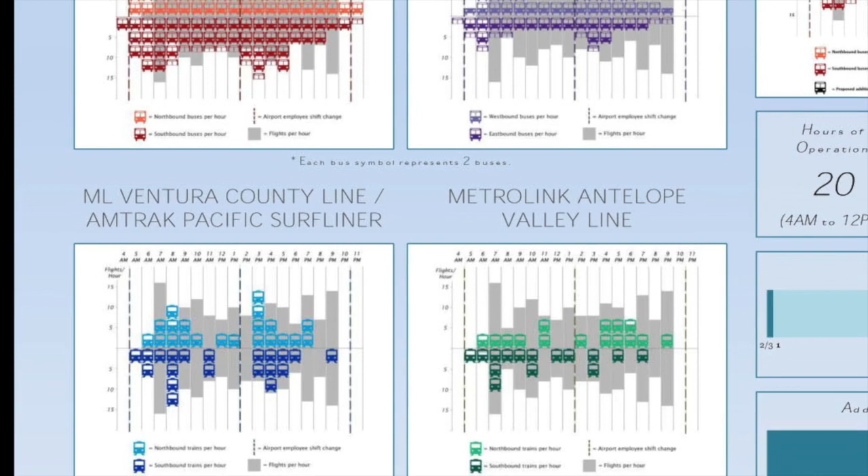And speaking of Metrolink service, what we're looking at in Item 5 is how we can focus transit schedules to serve airport needs. I've talked about this at previous meetings, but there are really gaps in the schedule right now—times when you might have to wait several hours for a Metrolink train to come by.

Here it shows throughout the day when some of those gaps are. So we're looking at a couple of different alternatives. One is improving Metro bus service in the area—there are a lot of Metro bus lines that run by. What we show is that filling in some of the early and late evening hours, and improving headways on some lines, can have a pretty good effect. We show a 17% additional ridership on some of those Metro lines for a fairly low additional cost. But it's a tough market since it's more for shorter distance trips.

So if we're looking at longer distance regional trips, you probably have to look at trains or things like that, and that's what these next two alternatives look at. In one option, we're basically just filling in those gaps in Metrolink service—we want to try to have a train coming by every hour. When you do that, we get good additional ridership, 3% over today, with some additional operating costs and quite a bit of additional capacity. It provides the reliability of knowing there's a train coming by every hour at a minimum, not just a couple of trains you have to catch.

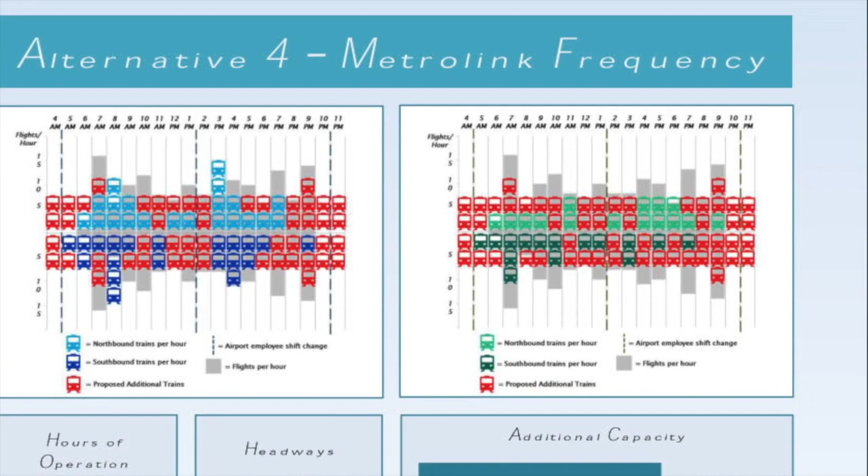Alternative 4 looks at really dialing up the Metrolink frequency even more, to a train every half hour or 20 minutes. What we showed is that while this bumped up ridership a certain amount, 6% compared to 3%, it has a very high capital cost to accommodate that many trains in the corridor. The cost per rider is quite a bit more than Alternatives 2 and 3 where we're just adding some limited trains. This tells a story that a train every half hour might be too much at this time, but a train every hour is more the reliability we're looking for.

Once you build that service, you might want to think about getting even more trains than that. But you can see it tails off a bit as you add too many trains in the corridor for certain times. So Alternatives 1 through 3 show some good results for some fairly limited additional operating costs in the corridor area.

Item 6 is about connecting the terminal to the surrounding transit service. What you see right now is the train station, for example, on the south side of the airport, and you do have to walk a bit to get to the terminal.

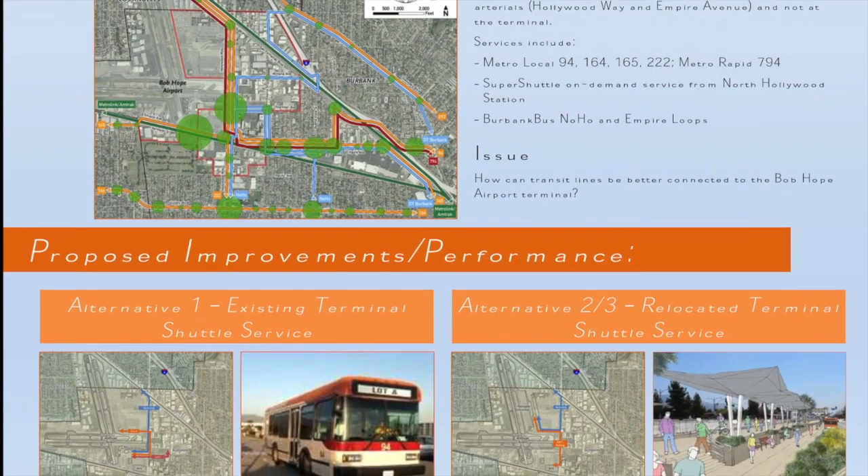Or also, if you get off the bus on Hollywood Way, you have a bit of a hike to get to the terminal. So how can we better improve those services to connect you from transit to the terminal area? What we're looking at in the first three alternatives is existing and improved shuttle bus service in the airport area. We show that, and we also show in the maps where those lines would go.

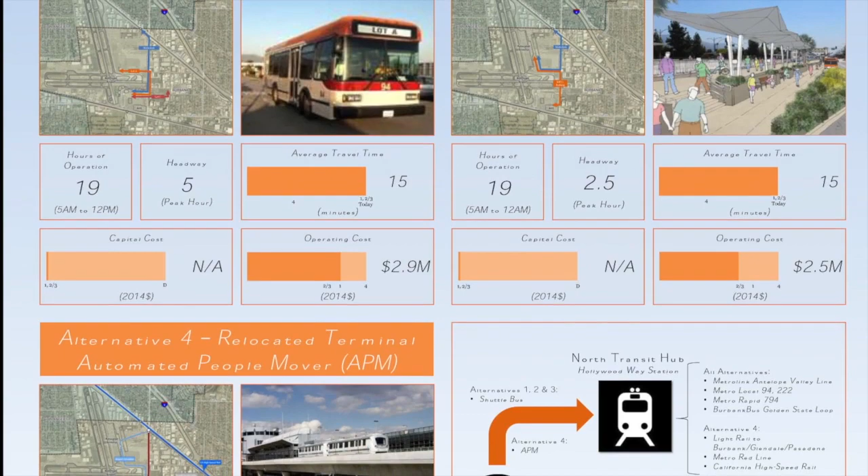A thing to note is that if you move the terminal and put a replacement terminal on the north side of the airport, you would have to provide shuttle service to connect to some of the amenities on the south side of the airport. And you could actually have some efficiencies by consolidating some of those lines.

But when we're then looking at the final alternative, Alternative 4, especially if you're talking about a red line station in the area, a high-speed rail station, and light rail service coming in from Burbank, Glendale, Pasadena, maybe something like an automated people mover train, like the example from New York shown on the upper right. It has a pretty high capital cost, though, something like $750 million to put that in. So what you really see is that probably doesn't make sense until you get a lot more of that service in the area, and you need those really high-intensity connections to get people back and forth.

As I talked about earlier, the diagram on the right shows you have these two transit hubs on the north and south side of the airport, and the different services that could come into them as part of the different alternatives. You have some really great options, especially for alternatives 2, 3, and 4, coming into both of those hubs.

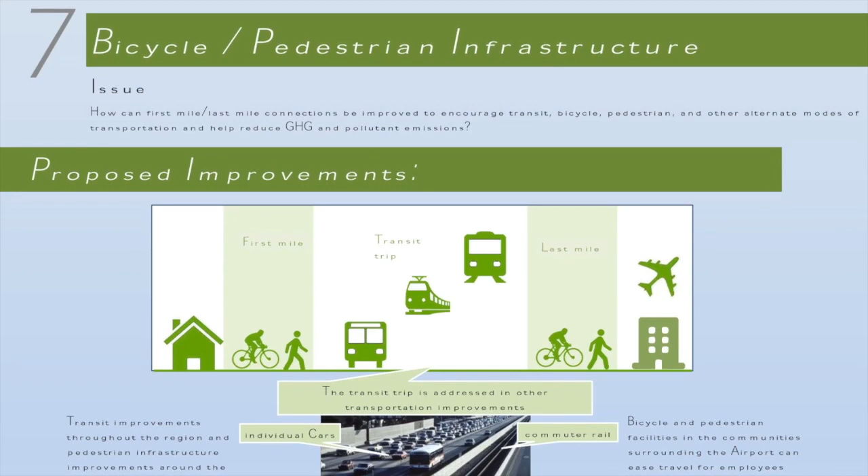The final piece of what we're looking at for improvements is focused on bicycles and pedestrians. There's already some great things planned as part of Burbank's general plan, which is part of a lot of focus on pedestrians and bicycles that's been happening in the LA area over the past 10 years. Really what it's about is making an easier first mile, last mile of your trip, allowing you to connect from your transit station to your ultimate destination, like an office or a house.

Gaurav already touched on improvements to the streetscape in the area that will be great for pedestrians. Another interesting concept is something called a mobility hub, which the City of LA, Metro, and others have been looking at. It basically brings together bike share, secure bike parking, and car shares like Zipcar or short-term car rentals into a single hub at something like a transit station.

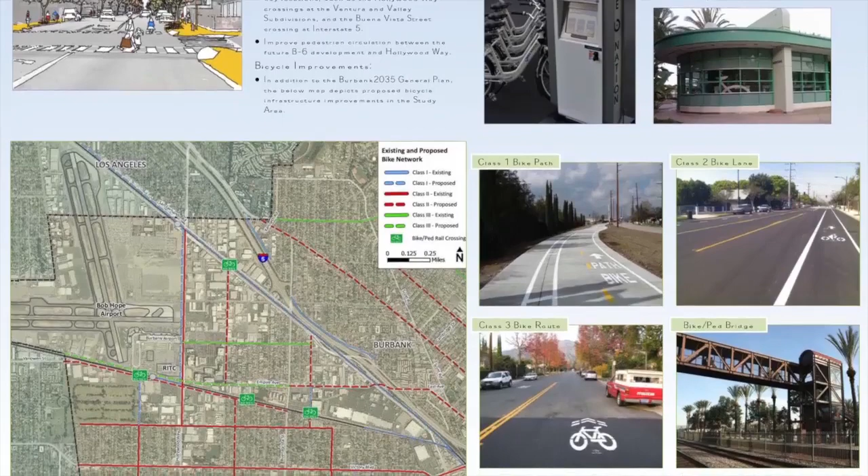What that really does is allow you to get to your final destination that maybe is outside of walking distance. That's especially relevant when you look at the land use, where we have areas beyond a 5 or 10 minute walk from the station. Something like this mobility hub will allow you to make that last part of your trip more easily and encourage you to use transit, whereas maybe today you would think about using a car.

It's something that's already being planned for the North Hollywood station, and I think we'd look at also trying to integrate some of the elements of that at those transit hubs on the north and south side of the airport as part of this study.

And then a final piece we show here is bike improvements. Class 1 is a bike path, Class 2 is bike lanes, and Class 3 is a bike route on streets. There's already some great improvements shown here as part of the City of Burbank plans, including a bike path along the railroad tracks along San Fernando Road.

One other thing I'd like to note is that there are some green blocks along the different rail lines. That's where we're looking at possibly improving pedestrian and bicycle service across the tracks, because while they are great transit connections long range down to Los Angeles or up to Palmdale, they also, in the immediate area, almost form barriers—it's very difficult to get from North San Fernando Road to South San Fernando Road and vice versa. So we're looking at ways we can possibly increase the connections across those railroad corridors.

So for the immediate area, they don't act like barriers, they act like we want them to, which is great transit options for people coming to and from the area. So those are the seven areas that we're looking at.

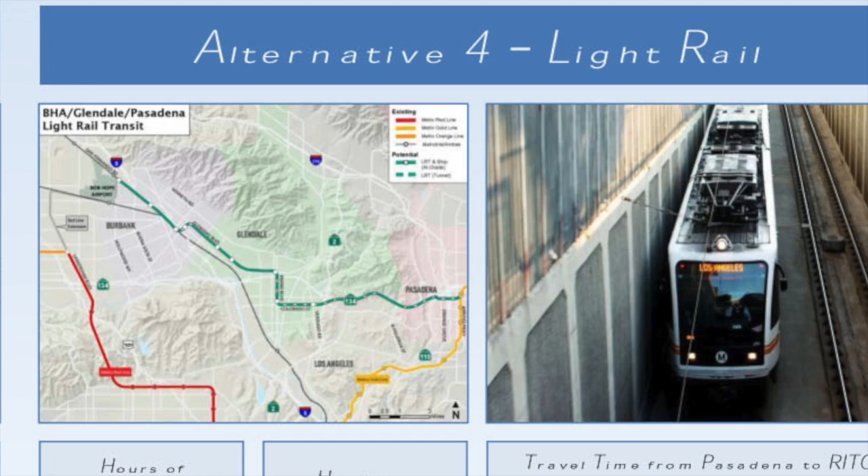The route is still certainly up for study. What I'm going to try to go through here is just to show it to you in general, but what it basically looks at is going along the 134 through the hill area between Pasadena and Glendale, and then once you get close to Highway 2, going more along Colorado over towards the Galleria, and then swinging up on either Brand or Central through downtown Glendale, and then for the most part running up Glen Oaks or through downtown Burbank and ending at the airport. But like I said, that's really a first cut at it — it's going to take quite a few additional studies to better define what that connection could be.

I wasn't quite clear about the overpass off of, not San Fernando, but the Empire — the new overpass going to the airport. Is that going to connect with the new airport? You said there was a walking sidewalk or something after you get over the Empire into the parking lot, and then you get on a walking sidewalk to the terminal. Well, if they move the terminal over to the north side, how do you get a shuttle bus to get over there? I mean, how is that working?

That's correct. So it provides a connection in the near term with the pedestrian bridge from the train station to the RITC, and then there's an existing moving walkway that takes you from there to the existing terminal.

But if you do have a replacement terminal on the north side of the airport, that connection, instead of being a moving walkway, would be with a shuttle bus, most likely, or a people mover, as part of the final alternative.

Can everybody hear me when I'm talking without a microphone? Why don't we just keep the microphone with the audience then?

When is the new terminal going to come into effect? Has that been nailed down yet?

No, they're still just doing some initial environmental studies on that, and the time frame has not been nailed down to my knowledge. And although the San Fernando shuttle is going to Palmdale, is that going to go to downtown Burbank and on into Los Angeles? That's correct.

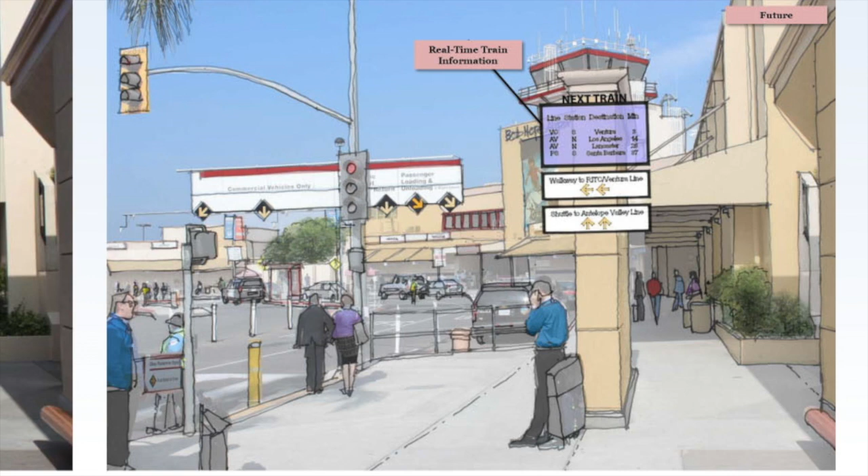One of the things that we are looking at, as part of what we show on the bottom there, is at least if you're at the airport area, to provide signage, changeable signage that tells you whether you should be going to the station on the south side of the airport or the station on the north side of the airport, if you want to be able to catch the next train, say, to downtown Los Angeles.

We had also been looking at some improvements as part of our study, trying to provide better signage on the rest of the system to know how to get to the airport.

So for example, if there's a train, say you're at Union Station and you want to try to get to the airport, the train would have a plane sign next to it, so you know this is the train I want to get on if I'm going to Burbank Airport.

So we're definitely trying to make that an easier experience, especially since if you're talking about airport passengers, a lot of them may be from out of town or not as familiar with the area, so we want to make it as easy as possible for them to ride the train.

Thank you. You're welcome.

You mentioned about the overpass on Buena Vista. Where does it land, and where did it start on the new train, and where is it going to land? And also my concern is the noise. When you have an overpass, what happens with the noise?

The overpass starts towards the south, basically by Costco. Am I correct, David? On the south end? Just north of the animal shelter. Okay, so yeah, just north of the animal shelter there on the south end. It goes up, it goes over Empire Avenue. It's going to go over Buena Vista and then come back down to the existing ground level just south of Hollywood Way. So that's kind of the extent of how it goes up and down over those streets there.

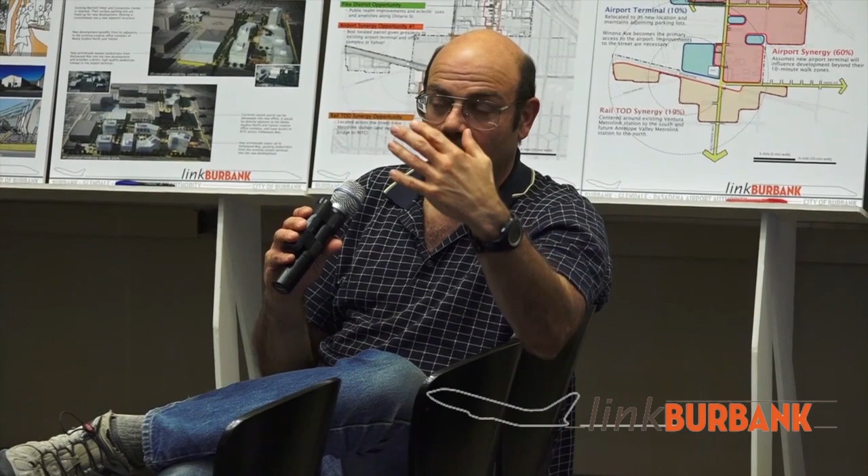Your last answer prompted this, because I hadn't realized that the overpass was just going to start once, not up and down, up and down. What's foreseen for what will be under that rail? Is it something parkish, or do we know? Has it been discussed? And if not, I hope it's parkish.

It's basically going to be up. It's not going to be up on a bridge the entire way. It'll be on bridges over Empire and over Buena Vista. But in between, it's basically going to be up on a fill structure with retaining walls, I believe, on either side. So directly under the tracks, it's going to be filled in with earth, basically. And then, like we talked about, there's also the bike path on one side or the other. But yeah, it's only going to be up with something underneath it in those two areas where it goes over the streets.

The San Fernando bike path would be grade separated over Empire using the Victory Place overpass, which is also going to go over Empire. But at Buena Vista, there'll be an at-grade crossing crosswalk with a signal.

So far, I like all the proposals for the buses, the trains, the bike paths, all this stuff. But I guess the one thing that a lot of residents are going to be talking about is trying to deal with the traffic situation on our streets. Right now, Hollywood Way and Buena Vista are having the most backup traffic that I haven't seen in many years. Along with this study and all these proposals, are you guys going to be looking into realigning any of these, like Hollywood Way or any of the streets between Hollywood Way and Buena Vista, to try to improve traffic flow to the airport and to the freeway?

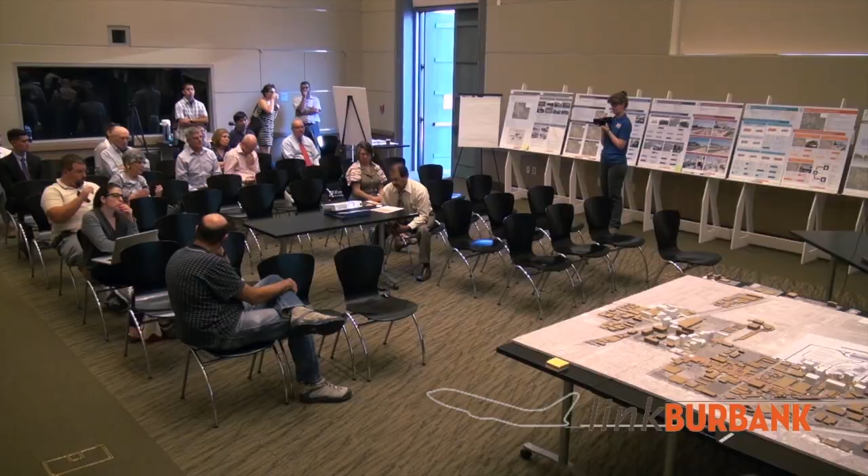I'll talk about the first point you had. I think our endpoint in the study is a little different than the land use side of things. We're not necessarily looking for a preferred alternative to pick, one column here. It's much more an implementation plan of here's what we can do in the near term with some fairly cheap bus options—they're not that cheap, but less expensive—and then as we build up ridership, to move to bigger improvements over time, more towards rail or something like that. For example, for streets, we're not looking at as many improvements, so they're pretty standard across the four alternatives, whereas for others, like the connection to Burbank, Glendale, Pasadena, there are some significant changes further up there. So you're right, it's a mix of some that are fairly standard and some where there's more, and we're looking at how to blend that into the best approach across the different timeframes we're dealing with.

On the second point, we did not look specifically at connections to other airports as part of this study, but it's something that has been a priority of Metro over the past year or so. They've been looking at regional airport connectivity—not just Bob Hope, but LAX, Ontario, Palmdale, and the rest of them around the region.

Hi, Paul Dyson. Just a comment on the current traffic issues and congestion. It's a matter of great concern, I think, as a member of the Transportation Commission, that Metrolink ridership is down. And I think that's a combination of some service issues, and also they keep putting the fares up. So people are finding it better to switch back to using their cars, and that has a direct impact on the amount of traffic on Buena Vista and Hollywood Way.